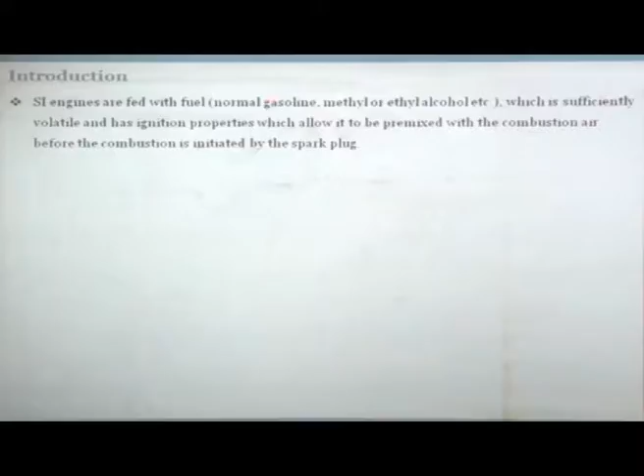And in this context, it becomes extremely important for us to consider that carburation is a relevant technology for 2-wheelers. So the SI engines are normally fed with fuel, which in most cases is basically gasoline, or petrol.

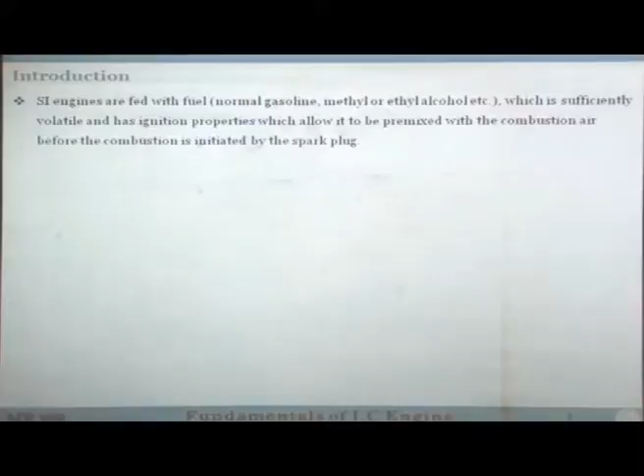But nowadays, there is a lot of drive towards introducing ethanol and methanol as well. So fuel could be normal gasoline or methyl or ethyl alcohols, or blends of the two. All these fuels are sufficiently volatile, and they have ignition properties which allow them to be mixed with the combustion air before combustion is initiated by a spark plug. The fuel has to be mixed properly and brought within the flammability range in order to start combustion with the use of a spark plug.

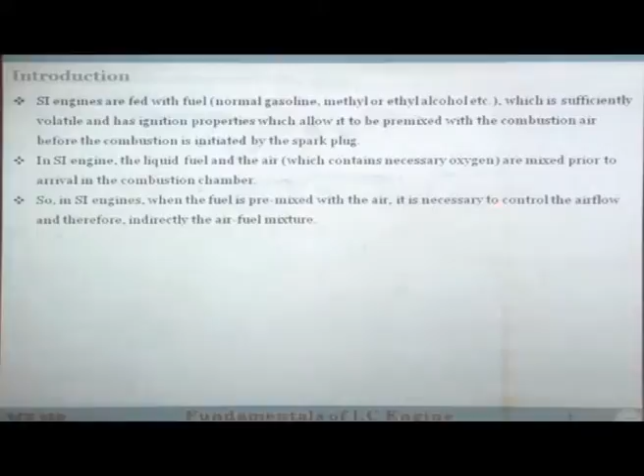So in an SI engine, the liquid fuel and the air, which contains the necessary oxygen, are mixed prior to arrival in the combustion chamber. Where are they mixed? They are mixed inside the carburetor. So in an SI engine, when the fuel is premixed with air, it is necessary to control the air flow rate, and therefore indirectly you are also controlling the air fuel mixture strength.

Now, this is as far as the story of the spark ignition engine goes. When it comes to compression ignition engine or diesel engines, one of the major differences between diesel and gasoline is that diesel is not volatile at all. We have seen that its volatility curve really starts at around 120, 130 degrees C.

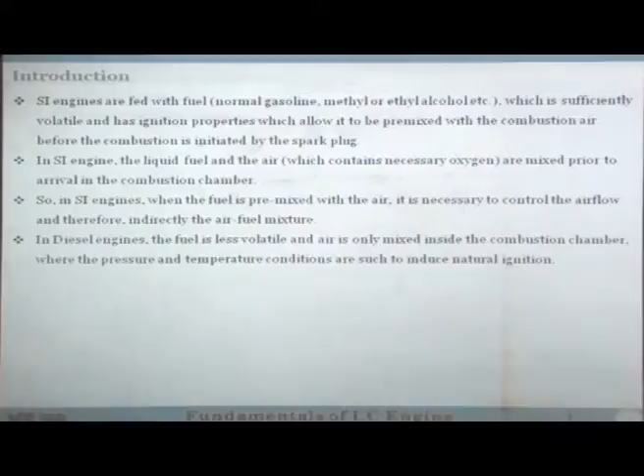Air is only mixed inside the combustion chamber. So fuel is less volatile, and it is mixed with the air in the combustion chamber at the end of the compression stroke, where the conditions are extreme: the pressure is high, the temperature is high. These pressure and temperature conditions are high enough to actually breach the auto ignition temperature of the fuel, so every small droplet will start burning by itself. That is what happens, and they induce natural ignition.

There is no spark plug. The fuel properties themselves allow the combustion of every individual droplet to take place inside the engine combustion chamber. Therefore, the power delivery of the engine may be adjusted by fuel delivery alone. You do not really have to worry about the air fuel mixture strength. If you have a high load condition, you inject more fuel; if you have a low load condition, you inject very little fuel. You do not need to control the airflow, because each droplet is burning independently.

But in the case of an SI engine, you need to control the air fuel mixture as well. So if you are having a low load condition, you have to control the fuel, but then you also have to control the air, and you also require to control the air fuel mixture ratio. So it is more complicated in SI engines.

So, the fuel air mixture can be prepared. I am talking in the context of SI engine only, so from here onwards, all the discussion is in the context of SI engine only. Air fuel mixture can be prepared either by a carburetor or by a fuel injection system.

You can have a small injector located in the manifold, injecting the fuel and preparing the fuel air mixture just before the intake valve, or you can have a carburetor, also in the intake manifold. In both cases, the fuel will be present in the inlet manifold as vapor, liquid droplets, and a thin film. In the intake manifold bringing the air fuel mixture in, you will have vaporized fuel, liquid droplets floating around, and around the walls of the manifold there will be a thin film. So, all three things are present.

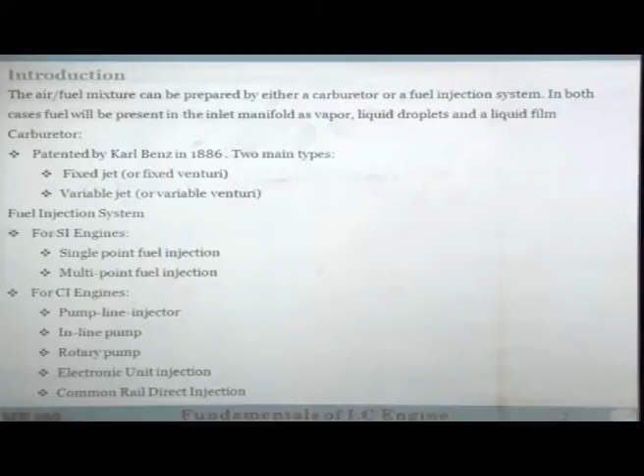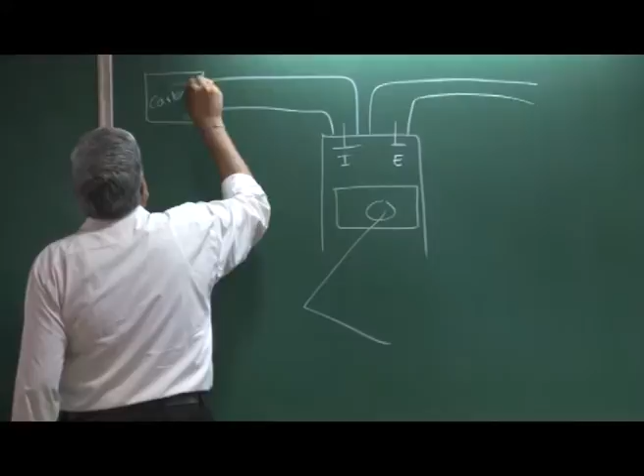So, if I have to draw a diagram and explain the difference, this is my intake, this is my exhaust. If I have to use a carburetor, I will put a carburetor here. Here you will have fuel coming in and also the air coming in. These are mixed and then taken in. This is the carburetor, and its main role is basically to prepare the fuel air mixture.

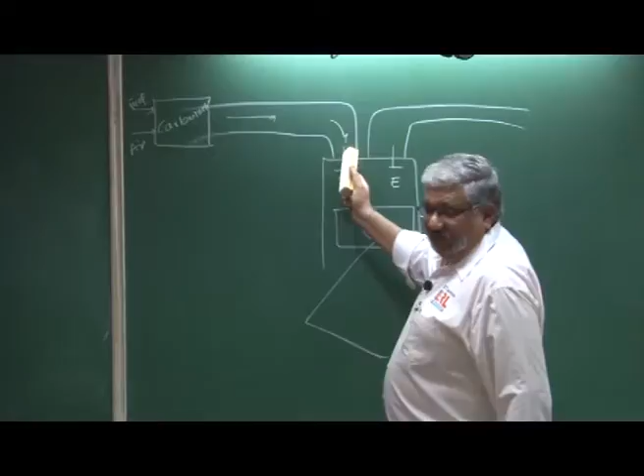So, when the fuel air mixture comes in, this is a mixture of fuel vapors, air, fuel droplets, and then there may be some thin film which is also sticking to the walls of the inlet manifold. When the valves open, this trickles down.

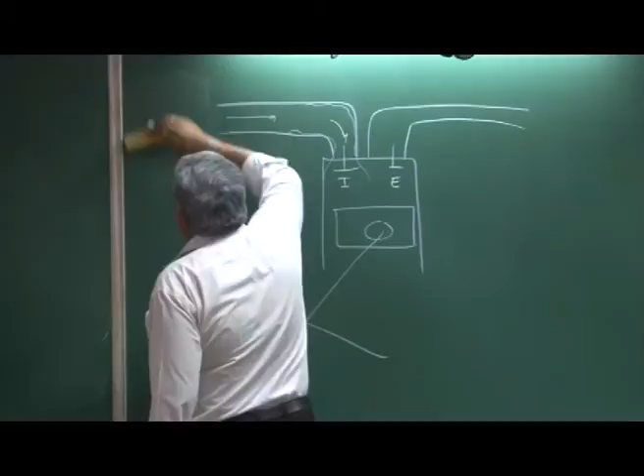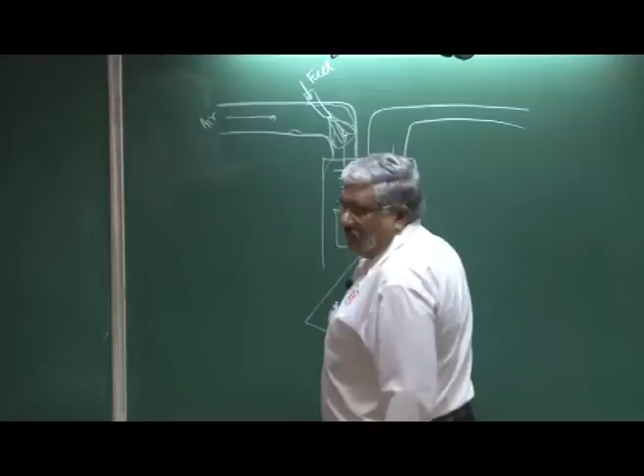The other technology we are discussing is fuel injection technology. Instead of a carburetor, you have a solenoid injector where the fuel is coming in. The air comes from here, and in the air stream you are actually injecting fuel droplets, and this is the region where the fuel and air mixture will get accumulated. As soon as the valve opens, the fuel air mixture will come in.

So, in any case, when the valve opens, the intake manifold will contain not just air, it will also contain the vapors of the fuel, in a spark ignition engine.

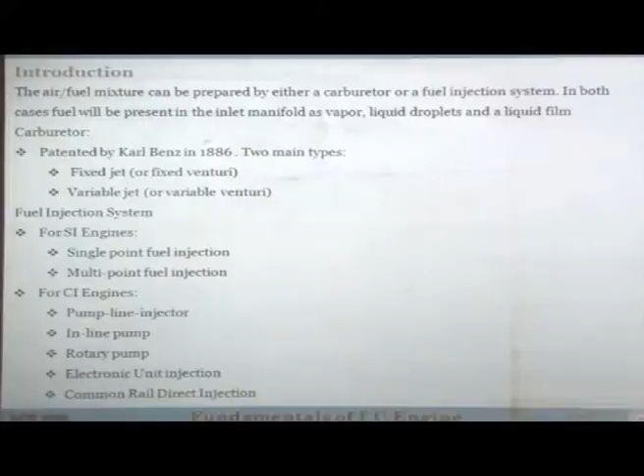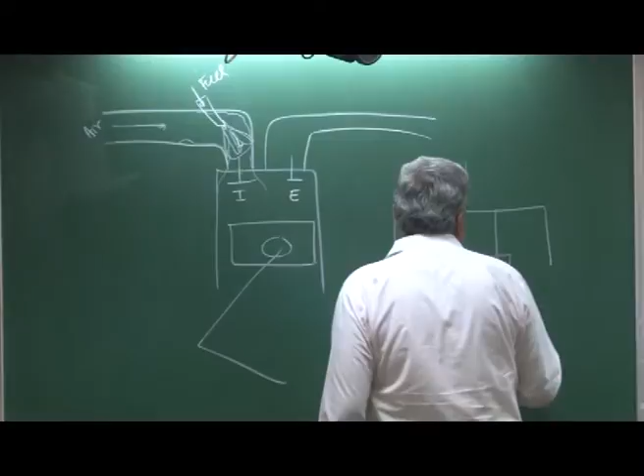Suppose you have a multi-cylinder engine, say a 4-cylinder engine, and I will just show the intakes, not making the details. Suppose this is a 4-cylinder engine. So, obviously you will have one injector here, one injector here, one injector for every cylinder, and in the center also you have another injector. So now can you call it single point injection? It is a multi-point injection, because now one cylinder is catered by more than one injector.

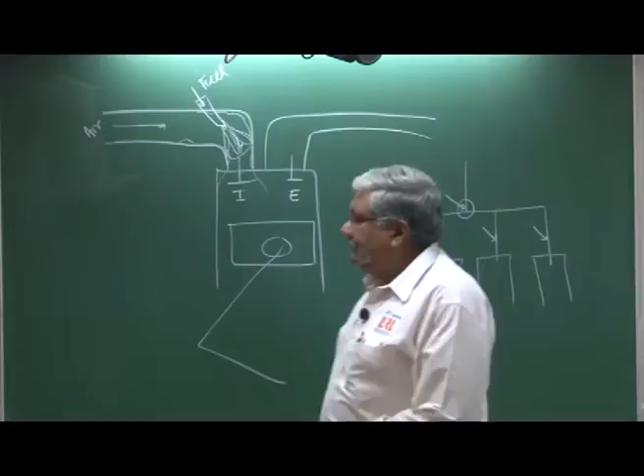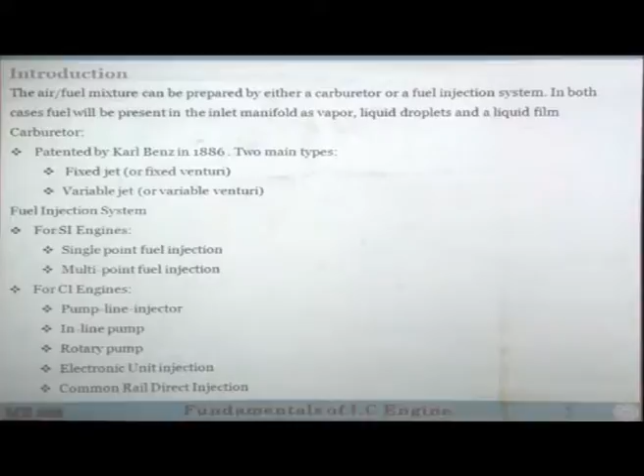Now, coming to diesel engines, they do not use a carburetor; diesel engines always use a fuel injection system. The main difference between this injection system and that one is that normally, except for GDI, if you are talking of MPFI engine technology which is prevalent today, the injection takes place in the manifold. However, now we have very modern engines called gasoline direct injection engines, where the injection is done directly in the cylinder and not in the manifold. I will talk about it later, maybe in an advanced course, but this is just to mention that it is now possible to have direct injection in the cylinder for gasoline as well.

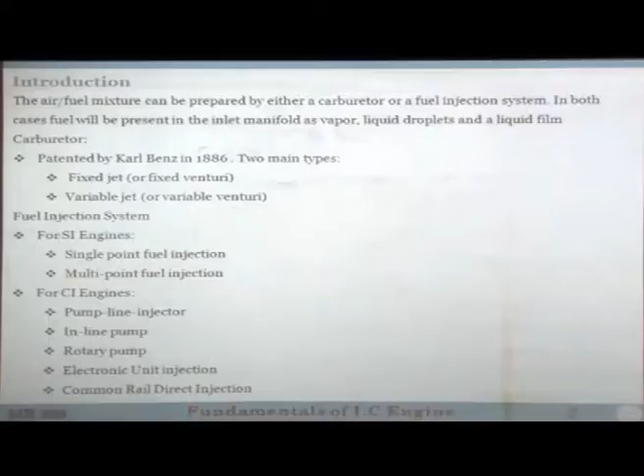In case of CI engines, the fuel is always injected in the cylinder itself. For example, if this is your cylinder, this is your intake manifold, and this is your exhaust manifold, the injector will be located here.

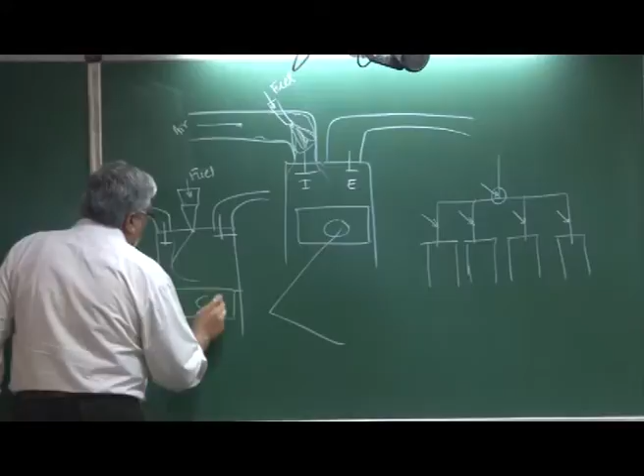So, the fuel is coming from here, air is coming from here, this is your intake valve, this is your exhaust valve. Air comes in, and when the piston goes up towards the end of the compression stroke, you have multiple jets coming out. So this is the situation in case of a diesel engine, it is directly injected in the cylinder.

Now, to do that, there are many types of systems. There are some systems which are mechanical fuel injection systems, meaning there is no electronic control. For example, pump line injector system, inline pump system, rotary pump system, and then there is electronic unit injector.

So these are all mechanical, but here you see there is introduction of electronics. The moment you introduce electronics into the fuel injection, you get an extremely high degree of flexibility and control. That means your injection can be extremely precise, timing can be changed without much of a problem, so you can have much better control on combustion, and as a result better control on pollutant formation, fuel economy, and power output all go up.

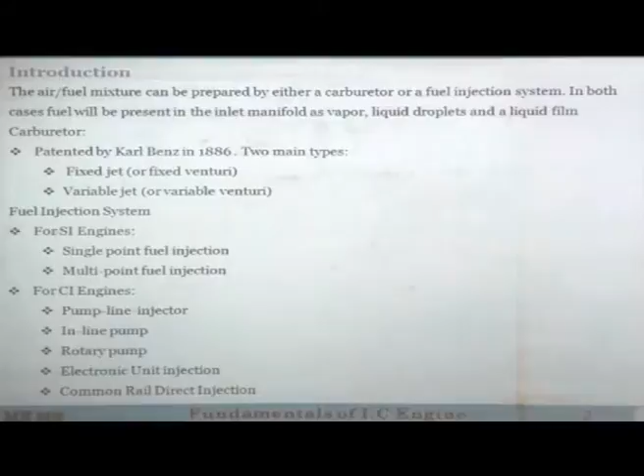So this is the line in which these systems have evolved. These are some of the most primitive systems, and then you have electronic unit injection systems and common rail direct injection systems, also called CRDI systems. So these are all fuel injection systems for diesel engines, these are fuel injection systems for gasoline engines, and these are the carburetor systems for gasoline engines. So this is the entire landscape of fuel induction systems for different types of engines.

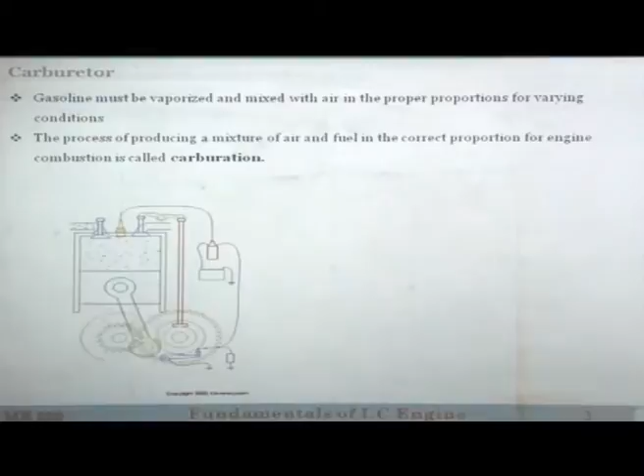One of the most important requirements is that gasoline must be vaporized and mixed with air in proper proportion for varying conditions. Do you think that whether you are idling the engine, or at middle load condition or full load condition, is the air fuel mixture requirement the same? Does it remain the same, or does it need to change? It should be changed naturally. So that means your carburetor should be able to cater to all the changing load and speed conditions. It is not that it has to give the same mixture strength all the time, it has to vary depending on the expectations or requirements of the engine.

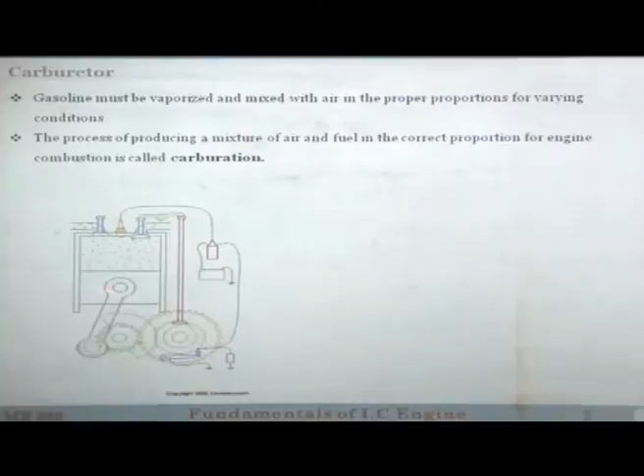So the process of producing a mixture of air and fuel in the correct proportion for the engine combustion is called carburation. Here you see a simple cartoon shown where the combustion is happening, it does not have much information. A carburetor is a device that blends air and fuel for an internal combustion engine, and this is on a very high level how a carburetor looks like. I will explain this to you because understanding it is very important, and then the discussion will follow.

So you see this is the intake filter, air filter. Air whenever enters, the first thing it encounters is the filter. Why? Because you do not want any particles or dust to go into your engine. Air may look clean, but it has a lot of particles. If you look at the beam coming out of this projector, you can identify the particles. So in this room we are all the time inhaling particles. Our filter is located in our nose. Similarly, the engine filter is shown here, and its job is to arrest all the particles and allow as low a number of particles as possible in the flow, because if there are more particles, they will go into the combustion chamber, and if they are non-carbonaceous, they will not burn.

They will come in between the piston ring and liner interface and cause more wear of the engine, and engine durability will be affected. So anyway, the air comes in, and then you have a choke valve. Choke valve under normal condition is straight, so it does not pose any restriction. When do you want to take choke? When your engine is not starting. So then you make it horizontal. Once you make it horizontal, very small amount of air comes in. I will tell you how it works. For the time being, this is the choke location, that is all you understand, how it works I will explain later. And then you see this air is coming, and suddenly you see a reduction in the cross sectional area.

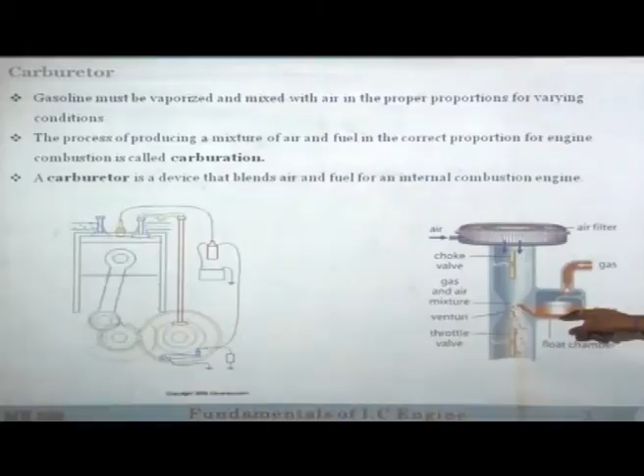This is float chamber, this is float, and the gas. Gas does not mean gas, this is gasoline or petrol. So petrol is coming in from here, air is going from here, and this is where the mixture formation takes place. So this is the carburetor working on a very high level.

If you have understood it, then I will tell you what more complications are introduced in this device.

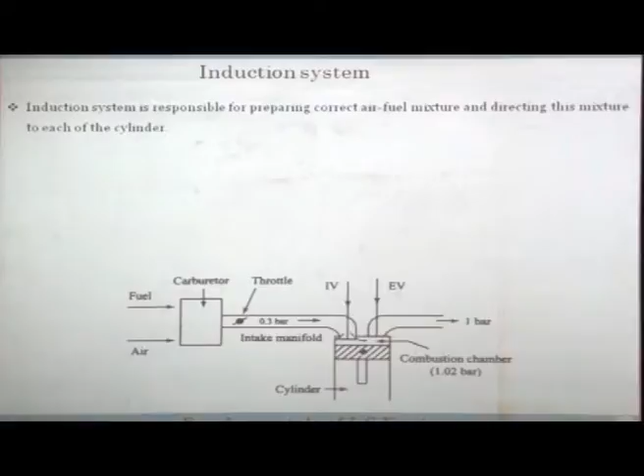So the induction system is responsible for preparing the correct air fuel mixture of desired strength and directing the mixture to each of the cylinders. If there is a multi-cylinder engine, for every cylinder you have one fuel injector.

But if it was a carburetor, you will not have these injectors, you will have just one carburetor here. So then a single carburetor will provide the air fuel mixture to all the cylinders. So carburetor is the main part of the induction system.

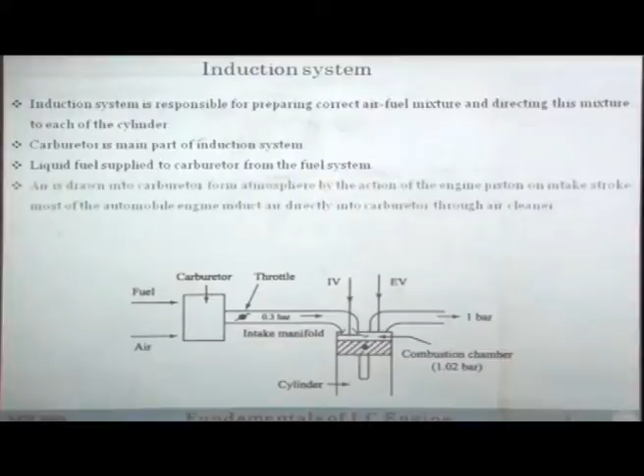Liquid fuel is supplied to the carburetor from the fuel system. Fuel system means tank and supply lines, etc. So air is drawn into the carburetor from the atmosphere by the action of the engine piston on intake stroke. When the piston goes down, obviously you are creating some vacuum, and just because of the sheer vacuum, this fuel air mixture will be sucked in.

You can see here, this is the intake valve, this is the exhaust valve, and this is the combustion chamber. So when the piston goes down, obviously here exhaust is going out at 1 atmosphere, but when the piston goes down, the pressure here falls to below 0.3 bar. So that means now it will suck the fuel and air mixture through the carburetor, and then the mixture will be prepared in the carburetor itself.

How much will be this depression of this pressure? It depends on how much the throttle is open. So air is drawn into the carburetor from atmosphere by the action of engine piston and intake stroke.

Most of the automobile engines induct air directly into the carburetor through the air cleaner. Through the intake manifold, fuel and air mixtures travel from the carburetor to the cylinders, and the throttle is located in the carburetor, which regulates the quantity of this air fuel mixture generated by the carburetor, which is entering the cylinder. So basically how much mixture needs to be allowed to go into the engine is controlled by the throttle.

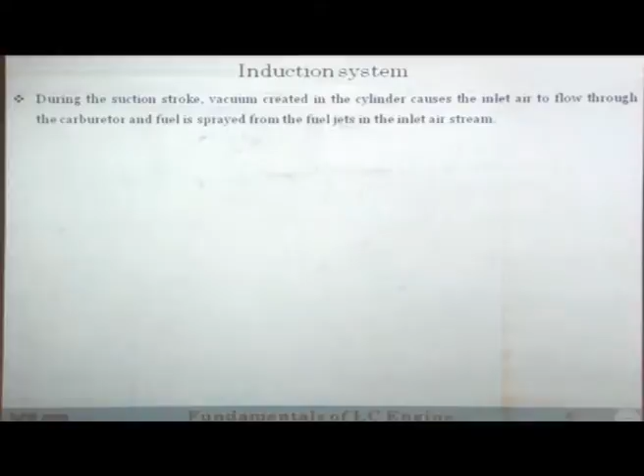So during the suction stroke, vacuum created in the cylinder causes the inlet air to flow through the carburetor, and the fuel is sprayed from the fuel jets into the inlet stream, as I explained to you just now. Most of the fuel vaporizes and forms a combustible fuel air mixture because of the high volatility of the fuel. It is a highly volatile fuel - gasoline, ethanol, methanol, these are all highly volatile fuels.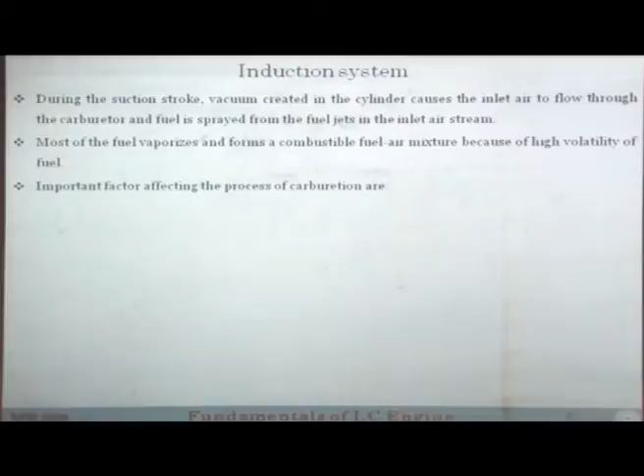So important factors which affect the process of carburetion include how much time is available for mixture preparation. If you are doing it very fast, the fuel droplet may not evaporate, but if you are giving it sufficient time, you will have reasonably good vaporization.

Then, what is the temperature of the incoming air? If it is cold air, say -10 outside, the carburetion quality will be bad, and if it is 40, it will be extremely good.

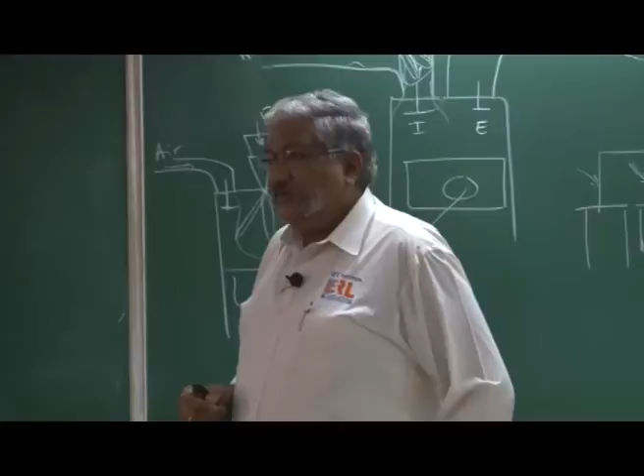That is why in the summertime you do not experience starting problems in the morning, but in wintertime you do, because temperature affects the process of carburetion due to volatility issues. That is why, as discussed earlier regarding fuel, winter gasoline is different from summer gasoline, because oil companies put lighter fractions in it so that in cold conditions the engine can start without much difficulty.

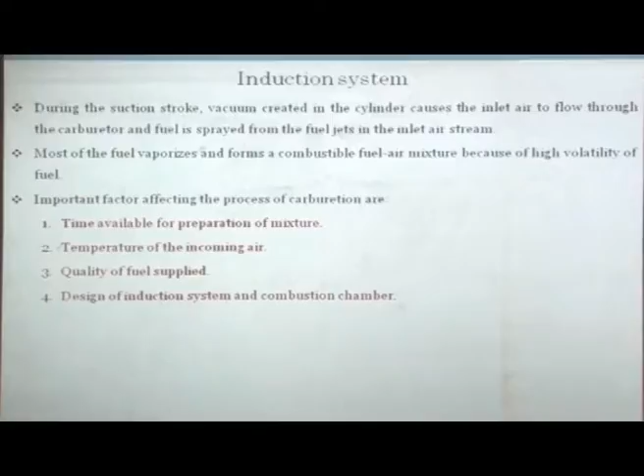The third factor is quality of the fuel supplied, which is again related to vaporization properties. The design of the induction system and combustion chamber is another factor which affects the process of carburetion.

Now let us look at combustion chemistry. We assume the fuel gasoline to be isooctane, with molecular formula C8H18, as we have done before. When it reacts with oxygen, you need 12.5 moles of oxygen, and multiplying 12.5 with 3.76 gives the moles of nitrogen. This gives 8 moles of carbon dioxide, 9 moles of water, and 47 moles of nitrogen.

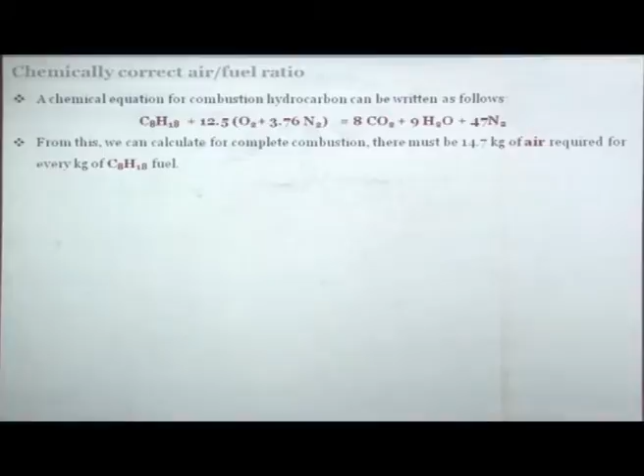So this is, at a high level, the combustion of isooctane. When you do the mass balance, you will see that for each kilogram of fuel you require about 14.5 to 15 kilograms of air. So we can calculate that for complete combustion there must be 14.5 to 15 kilograms of air for every kilogram of petrol or isooctane. So the stoichiometric air fuel ratio in this case is 14.7 to 1.

The quantity of fuel calculated by this method is the ideal amount necessary to react completely with all the oxygen present in the air. So no oxygen is to be seen in the product, no carbon monoxide is to be seen in the product - this is the ideal condition. Therefore this air fuel ratio is known as stoichiometric air fuel ratio or chemically correct, but this is an ideal situation and life is not ideal.

So when you provide only 14.7, you will always see some oxygen coming out, you will always see some carbon monoxide also coming, you will also see some hydrocarbons coming out. So the chemically correct air fuel mixture is not a mandatory condition for engine operation - that means you can sway on both sides.

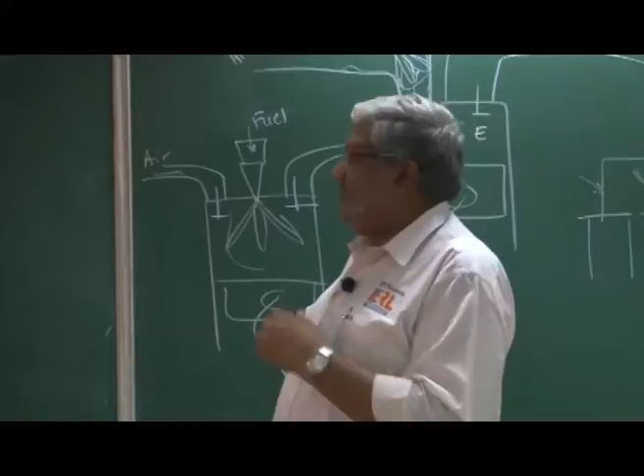When you want economy, which way would you like to sway? When you want fuel economy, you would like to go lean, meaning you would like to have 16, 17, maybe 18. And when you want more power and do not worry about economy, you would like to make it rich, going to say 13, 12, something like that.

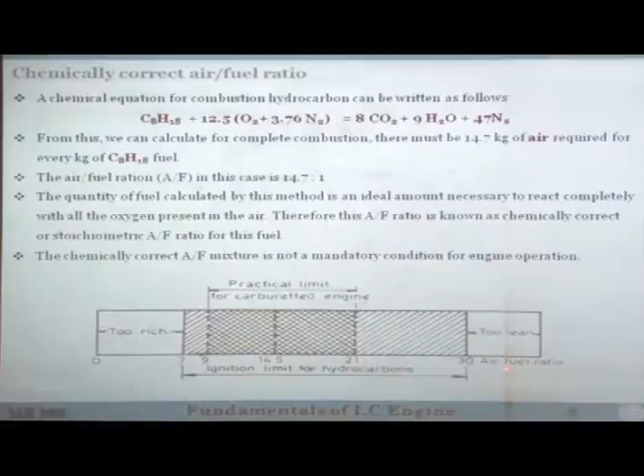I think I have shown you this figure earlier also - if you plot air fuel ratio on this axis, anything beyond 30 for a homogeneous air fuel mixture, you cannot ignite, it is too lean. And less than 7 is too rich, it will just not burn. So the practical ignition limit for hydrocarbon is between 7 to 30.

This is under most ideal conditions, but in the engine everything is happening fast, so it is not really ideal conditions that you have. So the practical limit for the engine is much shorter - between 9 to 21, or even, I have not seen 21, maybe 20 or even 18, 19, that is what you get.

So you do not really go too lean, because the moment you try to go too lean, you will have misfiring issues in the engine. The point I want to make is that the range of air fuel ratios for a practical engine, for all load conditions whether idling, cruising or high power, you have flexibility to move only in this zone. This is important because this is what is expected to be delivered by the carburetor. If your carburetor fails to deliver, the customer will not be satisfied, your engine will not be operating.

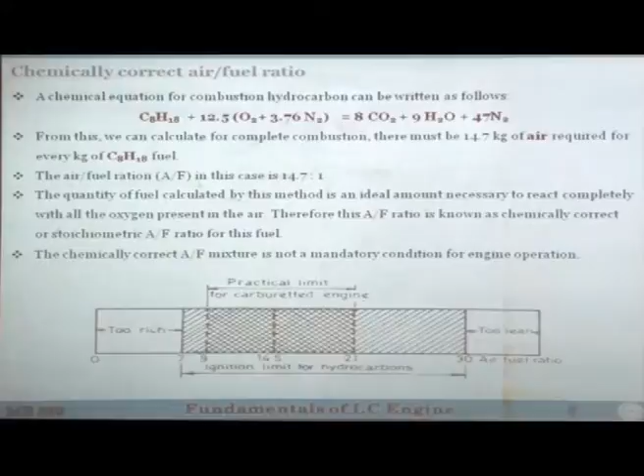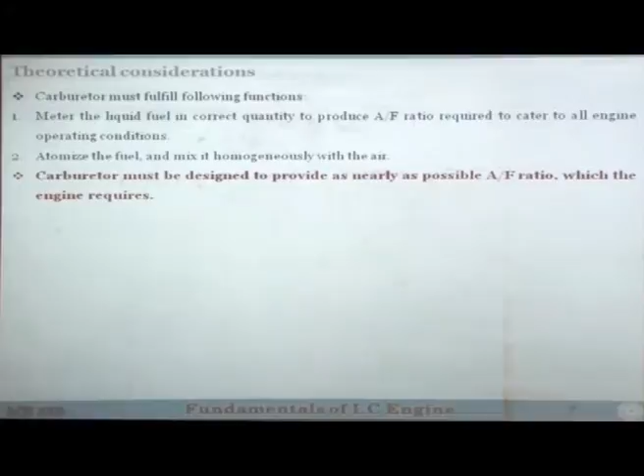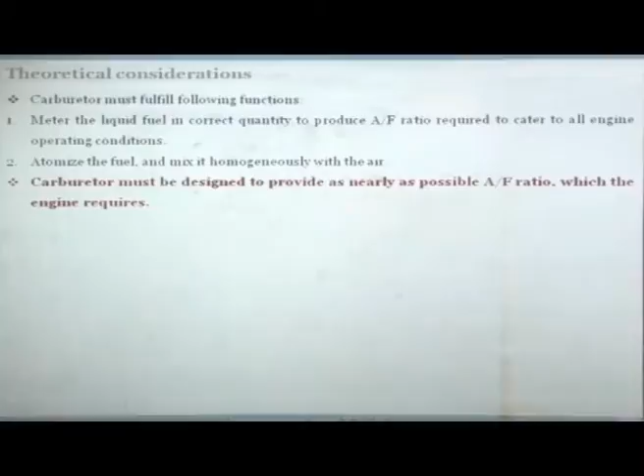So the carburetor must fulfill the following functions: meter the liquid fuel in correct quantity to produce the air fuel ratio required to cater to all engine operating conditions. It must also atomize the fuel - whatever jet comes out, the carburetor has to ensure the jet is broken into small droplets, because finer droplets mean quicker vaporization and more homogeneous mixture formation. So atomize the fuel and mix it homogeneously with the air - the carburetor must be designed to provide, as nearly as possible, the air fuel ratio which the engine requires.

Now I want to ask you something. Suppose you are idling the engine. What happens during idling? What kind of air fuel ratio will you need? Will you need stoichiometric, rich, or lean?

At idling conditions you will need rich, because the throttle is almost closed, so the air flow velocity is extremely small. And when idling you are just starting the engine, everything is cold, so you have to put extra fuel in order to start the engine.

When you are cruising at say 60 kilometers an hour, what air fuel ratio would you like? At that time you would like it as lean as possible, because your engine runs mostly in cruising, and that is when you want the best economy. When you want economy, you need a leaner fuel air mixture ratio.

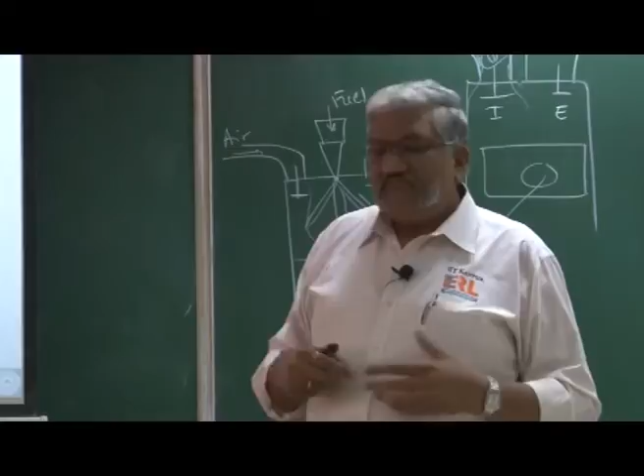Suppose you are at a traffic light and want to accelerate fast, or there's a truck coming from the front and you want full power to avoid an accident. Will you care about economy, or about getting maximum power output from your engine? Maximum power output. So what would you do? Obviously you would enrich the mixture.

So the demand is pretty clear. At no load or low load conditions, the carburetor should enrich the mixture. When cruising at a certain speed, the carburetor should give a relatively leaner mixture, leaner than stoichiometric. And when you want acceleration or high power output, the carburetor should give a rich fuel air mixture.

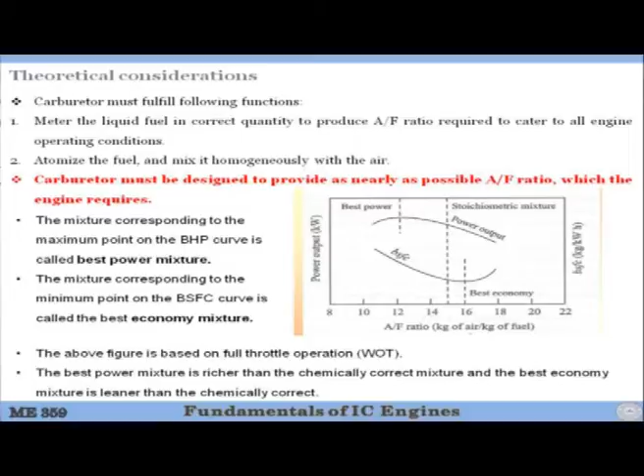This figure explains this all. This is power output on the y axis and air fuel ratio, kilograms of air per kilogram of fuel, on the x axis. This is stoichiometric at 15. If you look at brake specific fuel consumption, when would you get the best BSFC? Obviously around 16, mixture slightly leaner, that is when you get the best economy.

That is what you would like to obtain in cruising. The best power output comes out at 12. Power output of the engine drops when you make the mixture leaner, and on this side you do not have enough air. So around here you will be wasting 20% fuel, but that is when it gives you the best power output. This is brake specific fuel consumption.

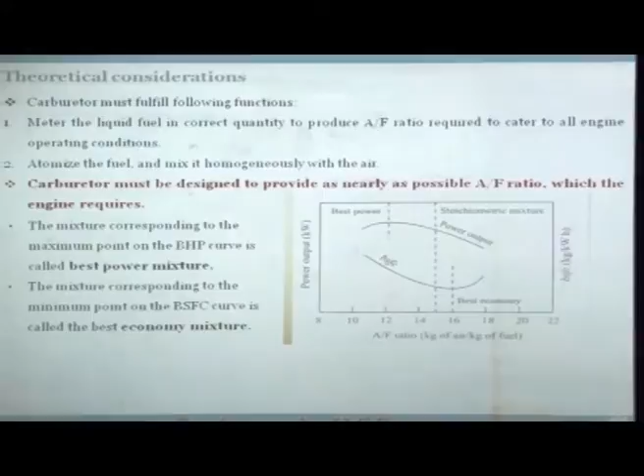The mixture corresponding to the maximum point on the BHP curve is called the best power mixture, and the mixture corresponding to the minimum point on the BSFC curve is called the best economy mixture. So this is the best economy mixture and this is the best power mixture. Depending on the circumstances, your carburetor should be able to deliver both, and everything in between.

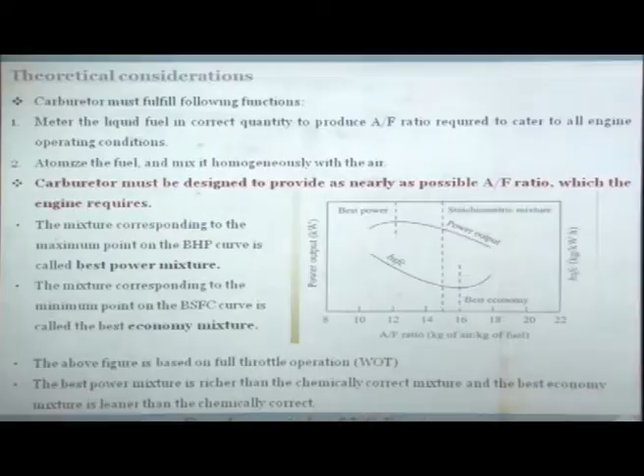This figure is based on full throttle, wide open throttle, WOT. The best power mixture is richer than chemically correct. You can see this is chemically correct, this is the best power mixture, and the best economy mixture is leaner than the stoichiometric mixture. So the air fuel ratio for best power and best economy at part throttle are not strictly the same as at full load. You have to keep this in mind.

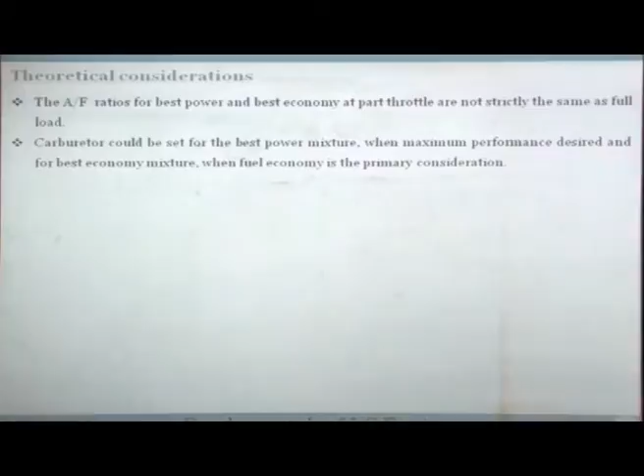The carburetor could be set for best power mixture when maximum performance is desired, such as for Formula 1 cars. At that time you set your carburetor to give you best power mixture. But when it comes to your own motorcycle, you don't worry about best power, you worry about best economy. So you set your carburetor to deliver the best economy mixture when economy is the prime consideration. In fact, in India we are one of the world leaders in technology for 4-stroke two-wheelers.

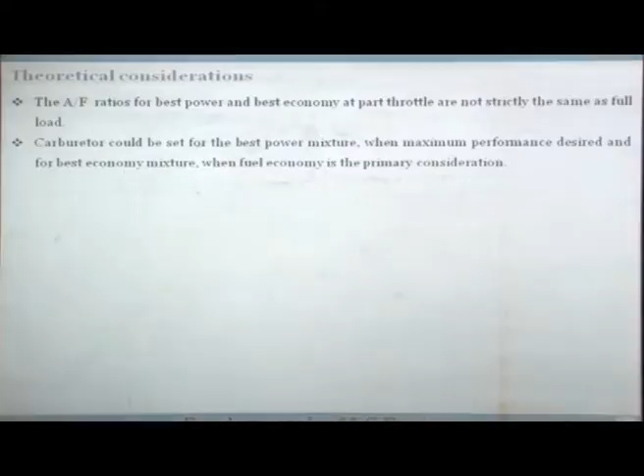The Indian two-wheelers are among the most efficient two-wheelers in the entire world. In 1 liter you can travel as much as 80 to 90 kilometers. Nowhere else in the world will you find a two-wheeler with that kind of mileage, because we economize everything. Our power output is so little, a 100cc engine is so small, that one person with maybe his wife and child can ride and cruise at 50, 60, 70 kilometers an hour without much of a problem. We set everything as best economy mixture, and that is how we extract the most mileage from the two-wheelers.

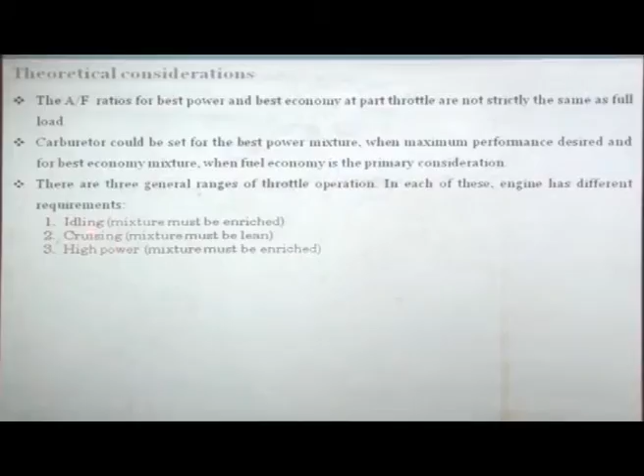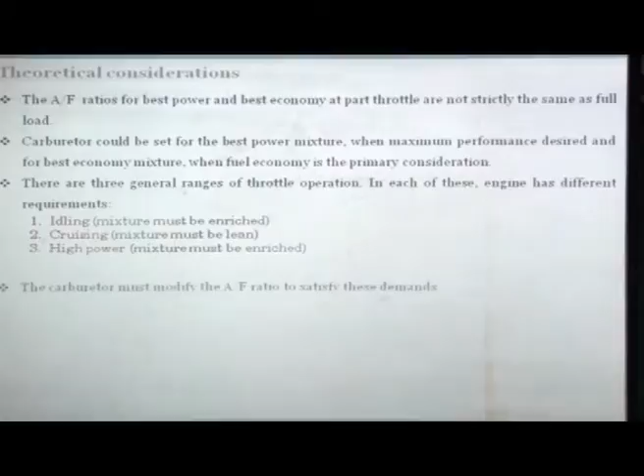There are generally 3 ranges of throttle operation, and in each of these the engine has different requirements. For idling, the mixture must be enriched. When cruising, meaning operating the engine steadily at a certain speed, say 50 to 80 kilometers an hour, the mixture must be lean because you want the best fuel economy. At high power, you enrich the mixture. Your carburetor should be able to satisfy all of these conditions.

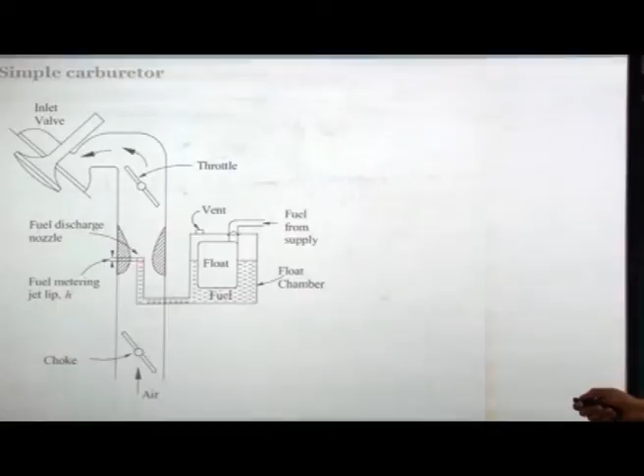Please look at this level, the nozzle is higher than this level. Why do you want to do that? Because when the vehicle is parked, you do not want the fuel to come out. If this were at the same level, fuel would just keep coming out even when the engine is not started. So you provide a fuel metering jet lip, a small jet lip, so that even if the vehicle is accidentally tilted, fuel should not come out. Otherwise, you park the vehicle somewhere, go for shopping, and by the time you come back the entire tank is drained. So that is very important.

So this is the throat and this is the throttle. The rest I have already explained. More throttle you pull, more air fuel mixture quantity will go in.

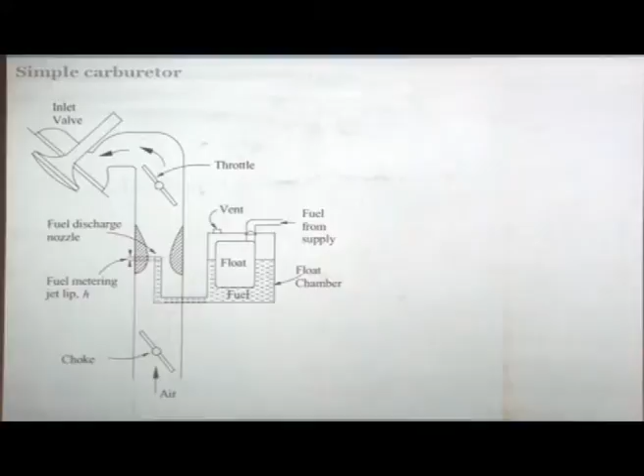Let me show you how this choke works. When you pull the choke, this almost closes. That means very small quantity of air will go in, and once that happens and you are cranking the engine, suction will be created, so more vacuum will be created here, because you have constricted the supply. There is always some hole, you allow some air, you do not completely choke it. If you look at the choke valve, there is always a hole, so you allow some air to go in, but not a free supply of air.

So when you choke it, here the pressure, which was 0.3 bar, will drop to 0.1 bar or so, and here it is 1 atmosphere. So because of the more pressure difference between these two, more fuel quantity will be injected, and therefore your cylinder will get a richer mixture and you will be able to start in idling.

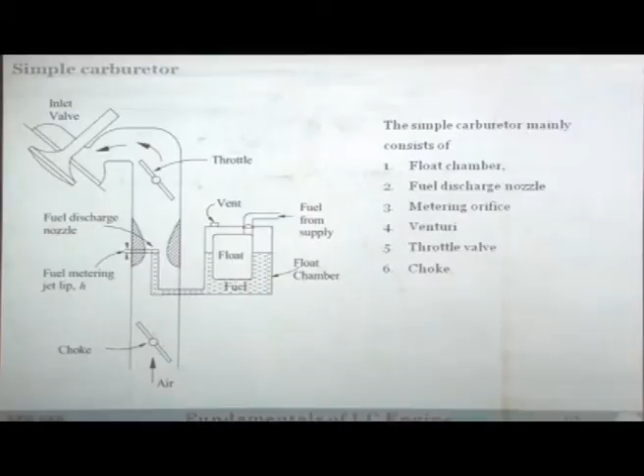If you look at this simple carburetor, it consists of 6 different components. One is the float chamber, which is this one. Then you have the fuel discharge nozzle, which is this one. The metering orifice is somewhere here. Then you have the venturi, this is the venturi, and the throttle valve, this is the throttle valve, and this is the choke.

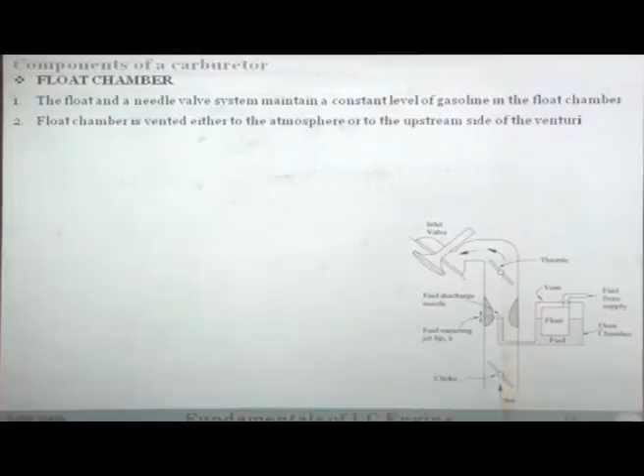This is the float chamber, let us see what it does. The float and needle valve system maintains a constant level of gasoline in the float chamber. Their job is to make sure you are maintaining a fixed level. The float chamber is vented either to the atmosphere or to the upstream side of the venturi. Here you have atmospheric pressure, because as fuel is going in, if this level falls and it is not vented to atmosphere, some vacuum will be created that will not allow the fuel to go in. So you have to keep it vented so that there is always 1 atmosphere of pressure here.

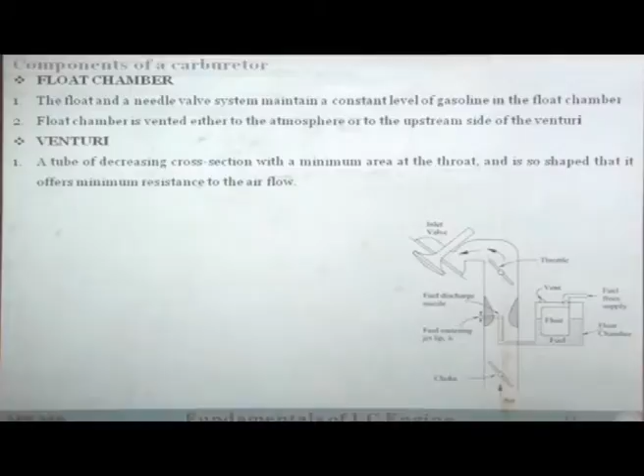This is the venturi, a tube of decreasing cross section with a minimum area at the throat. This is the minimum area, and that is why this is called throat, and it is shaped so that it offers the minimum resistance to the airflow. As the air passes through the venturi, the velocity increases, reaching maximum at the venturi throat, and correspondingly the pressure decreases, reaching a minimum.

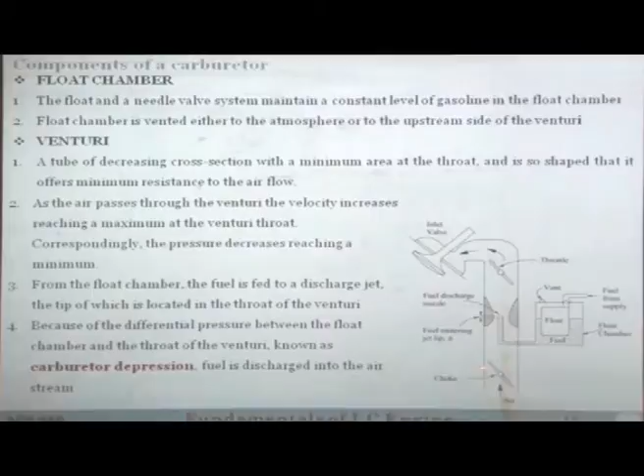From the float chamber, the fuel is fed to a discharge jet. This is the discharge jet, the tip of which is located in the throat of the venturi. Because of the differential pressure between the float chamber and the throat of the venturi, known as carburetor depression, the fuel is discharged into the airstream. So when you pull the choke, this carburetor depression increases, and that is why you are able to dump more fuel into a small quantity of air, enriching the mixture.

Let us look at the choke valve. This one here. The choke valve controls the air supply in order to provide rich or lean air fuel mixture. When you want to provide rich, you close it, and when you want lean, you put it at minimum resistance level. So when the choke is partly closed, a large pressure drop occurs at the venturi, which inducts a large quantity of fuel from the main nozzle and provides a very rich mixture. When you make it vertical, it provides a lean mixture because it does not obstruct the flow.

This is the throttle valve. A throttle valve supplies varying quantity of mixture at different load conditions. When you need more mixture, you pull the accelerator, and that increases the vertical nature. When you pull it to maximum, this becomes completely vertical, so you are able to supply more and more volume of the fuel air mixture, generate more power output, and operate the engine at higher engine speed.

This is the fuel nozzle. It is used to atomize and produce a fuel spray in the throat of the venturi.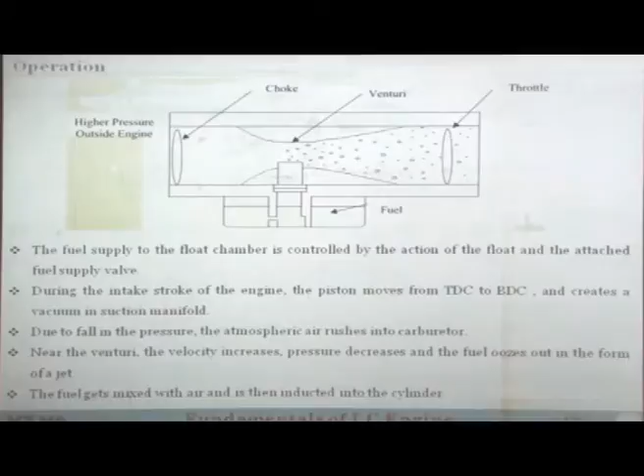So if you look at the operation, the fuel supply in the float chamber is controlled by the action of the float attached to a fuel supply valve. During the intake stroke of the engine, the piston moves from TDC to BDC and creates a vacuum in the intake manifold, causing suction. Due to this fall in pressure, atmospheric air rushes into the carburetor. Near the venturi, the velocity increases, pressure decreases, and fuel oozes out from the jet. The fuel gets mixed with the air and is then inducted into the cylinder.

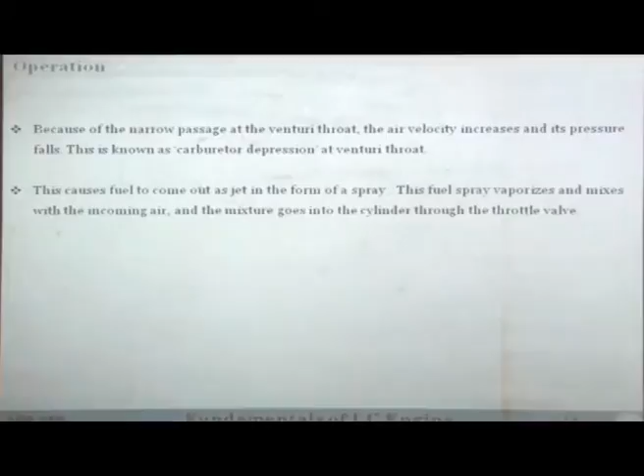Because of the narrow passage in the venturi, the air velocity increases and its pressure falls. This is known as carburetor depression.

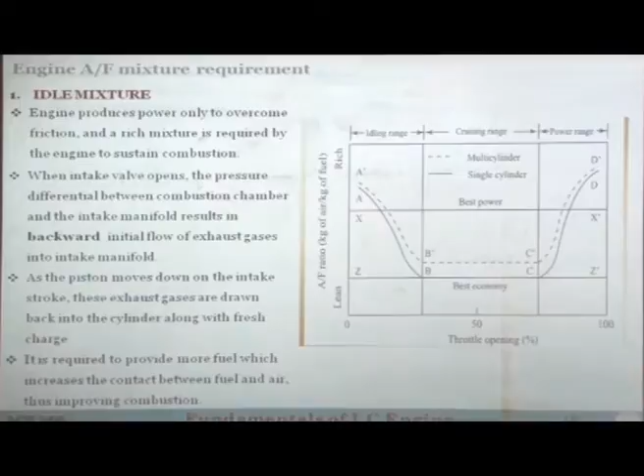Now this curve is very important. This is the air fuel ratio, this side is the lean side of the air fuel mixture, this side is the rich side. This is the throttle opening. When you are idling, meaning you are not pulling any throttle, you need a very rich mixture. The moment you start pulling the throttle, the air fuel richness requirement goes down. High idling is almost the same as cruising, and in the cruising range you need a lean mixture, say 16 or 17 air fuel ratio, and in the power range it again depends on how much throttle you pull.

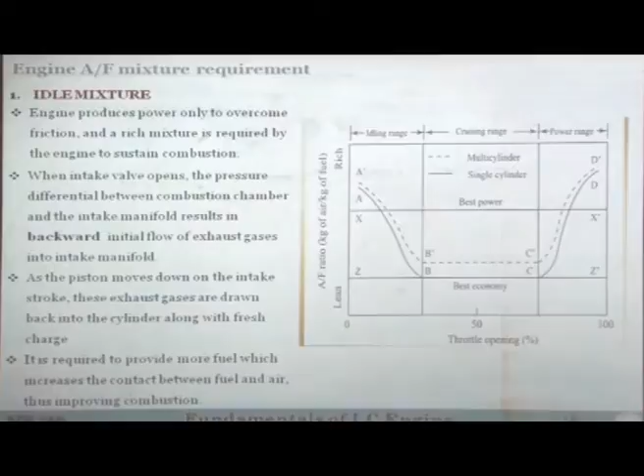When do you pull the throttle? When you need more power, you have to tell the engine that you need more power, and the only way to do that is to pull the throttle. So when you pull the throttle beyond a certain level, you are telling the engine, give me more power, I don't care about the economy, give me more power output, and that's when the carburetor will start enriching the mixture.

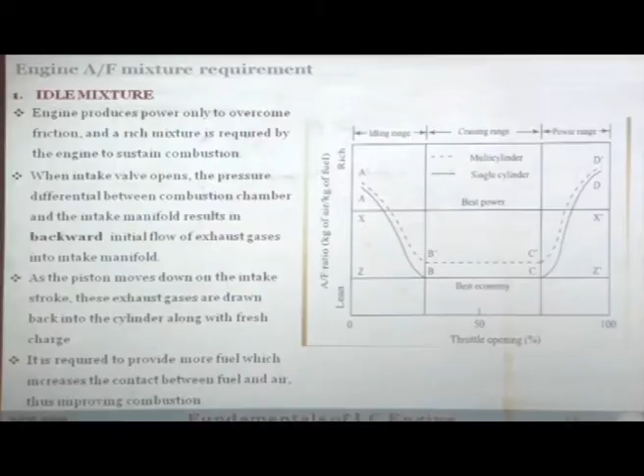Please note there are two curves here, one solid line and one dotted line. The solid line is for a single cylinder engine where there is only one carburetor and one cylinder, and the dotted line is for a multi-cylinder engine. In a multi-cylinder engine, the richness requirement is more.

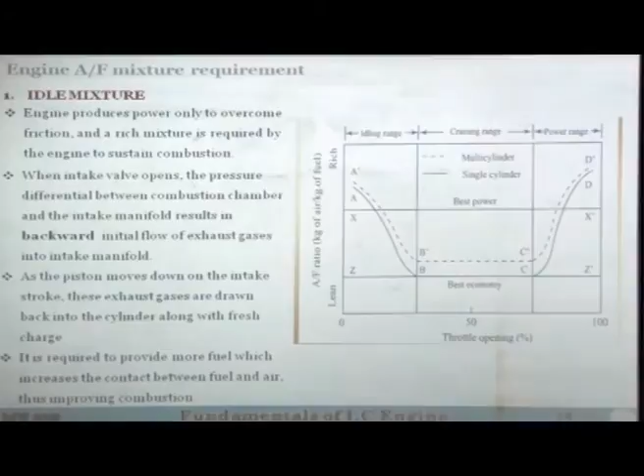Why more fuel? I'll tell you. Suppose this is your multi-cylinder engine and this is the carburetor. You have the carburetor here, and then there is a common manifold, and from there the air fuel mixture is coming in.

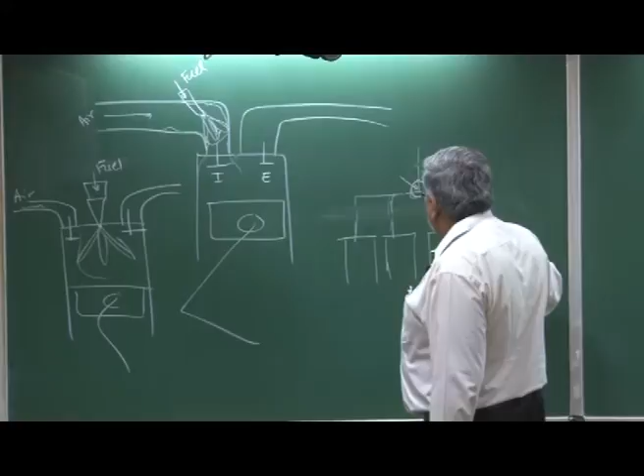Now, what will be the mixture coming out of this carburetor? It will be a mixture of fuel vapor, but there will be a lot of droplets, and droplets have higher inertia. So when they are traveling in this intake runner, fewer droplets will turn to this side because of their higher inertia, and due to that inertia force, they tend to move to the extreme. They will not like to change direction as far as possible.

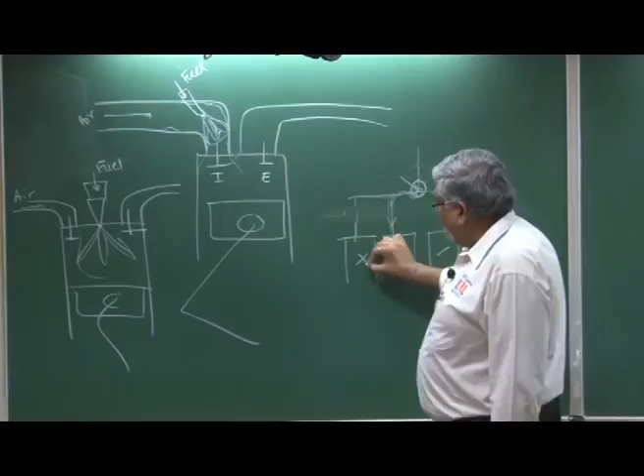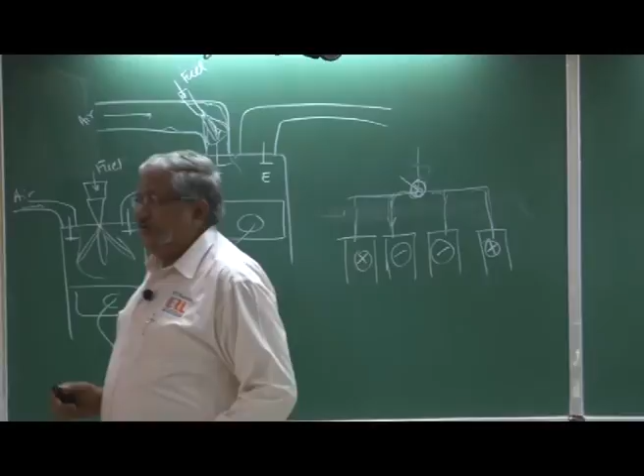As a result, these center cylinders will get a low fuel air mixture strength, while these extreme cylinders will get a high mixture strength. So the cylinders in the center will produce less power, and the cylinders at the extremes will produce more power output. To compensate for this, you actually put in more fuel, and that is why you use a richer mixture compared to a single cylinder engine, where everything comes into one cylinder.

So, at idling, the engine produces power only to overcome friction, and a rich mixture is required by the engine to sustain the combustion.

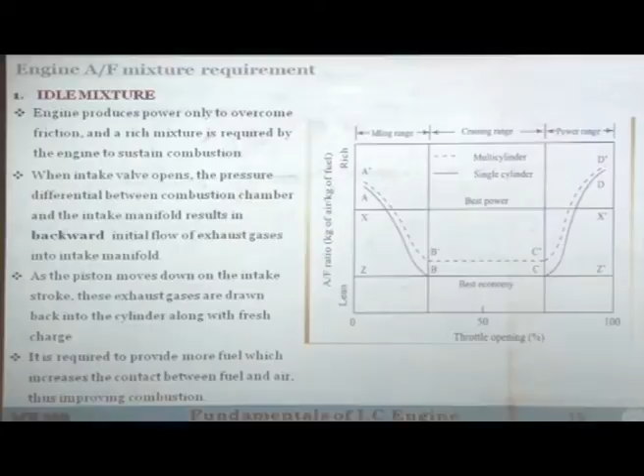When the intake valve opens, the pressure difference between the combustion chamber and inlet manifold results in a backward initial flow of exhaust gases into the intake manifold. So exhaust gases may actually come back into the intake manifold.

As the piston moves down during the intake stroke, these exhaust gases are drawn back into the cylinder along with the fresh charge. So fresh charge comes in, and therefore it is required to provide a more rich mixture, which increases the contact between fuel and air, thus improving combustion. That's why at idling you need to provide richer fuel air mixtures.

Idling system, how do you achieve this? You have to make some provisions in the carburetor to give a richer fuel air mixture. So at idling, you put in an idling system, which consists of an idling fuel passage and an idling port.

When the throttle is partly closed, a depression past the throttle valve allows fuel to go into the intake through the idling tube, and this depression also draws air through the idling air bleed to mix with it. Let me explain this to you.

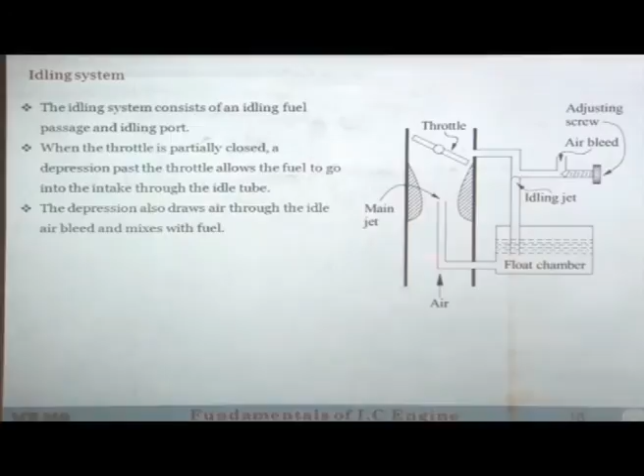Suppose this is your float chamber, this is the normal throat and main nozzle. This is supplying you the desired quantity, but at idling you need more quantity, so for the same air, more fuel should be supplied. So what you do is, close to the throttle, you provide another pipe, which is called the idling jet.

There is a screw here, and there is an air bleed. So air comes in, fuel is sucked in, and here there will be a lot of vacuum because it is located very close to the throttle, making a narrow passage. So the air velocity will be very high, creating a low pressure zone here. Because of this low pressure zone, the fuel air mixture is sucked in, air comes in from here and fuel comes in from here, and both are injected, with an adjusting screw.

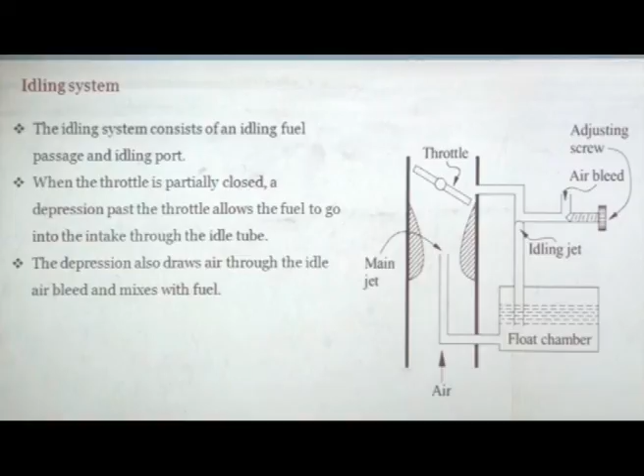So you must have seen that if you go to a mechanic with your scooter, he adjusts a jet and says, I am adjusting the jet. What is that jet? It is this one. What he is doing is starting the engine and adjusting this jet, so he is able to obtain a certain minimum air fuel ratio even when the throttle is completely at zero level, and that's how you get a richer air fuel mixture.

Now, when you pull into the cruise condition, there will be no vacuum here, and because there is no vacuum, there will be no additional fuel flow. So the fuel flow will stop. This idling system will only work when you are idling.